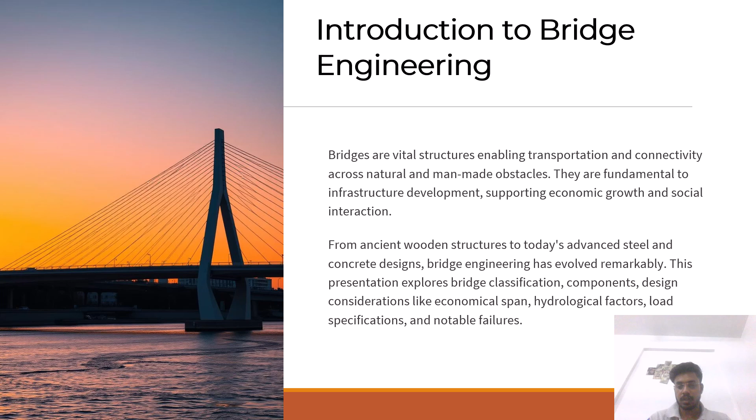Let's go to the classification and types of bridges. Based on structure, bridges are classified accordingly. Beam bridges are basically found in cities. Arch bridges are majorly used for railway bridges. Suspension bridges are made over seas where long spans are required. Cantilever bridges can also be found in major cities. Truss bridges are also used for railway transport basically. Based on material, bridges are classified as timber or wooden bridges, steel bridges, concrete bridges, and composite bridges, which combine concrete and steel together.

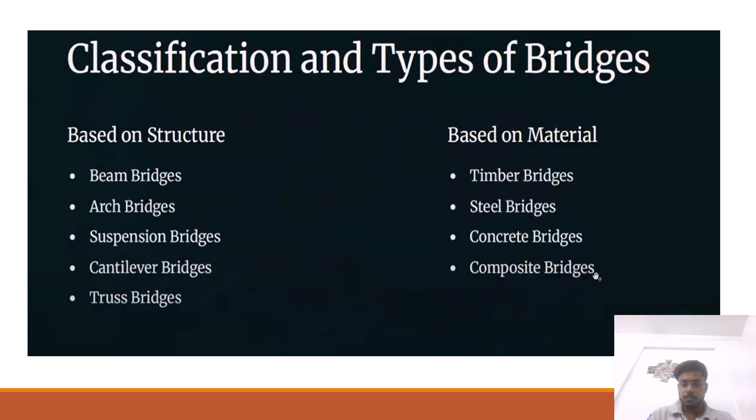Let's see the components of bridges. First, the deck of the bridge, which is the surface on which traffic moves, transferring loads to the supporting structures. The deck is the road on which vehicles travel. Next are piers and abutments, which are vertical supports that transfer loads to the ground. Piers are the intermediate supports, while abutments are the end supports.

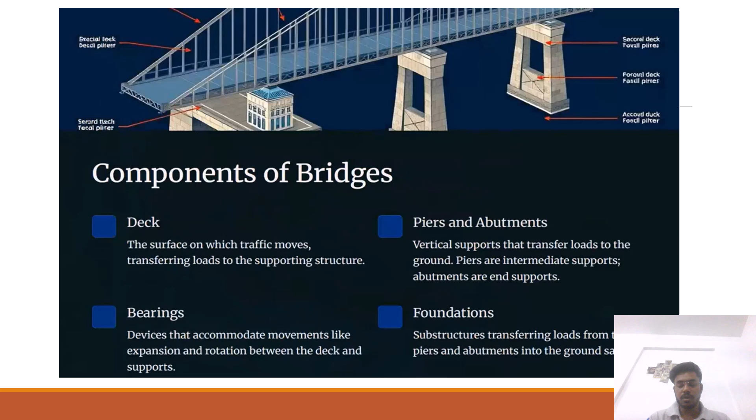Bearings are devices that accommodate movements like expansion and rotation between the deck and supports, transferring the load from the road to other components of the bridge. Then, most important, the foundations of the bridge: the substructure transfers loads from piers and abutments into the ground with the help of the foundations.

Now let's move to economical span and afflux. What economical span must a bridge have, and what is afflux? We will learn this in this slide. Economical span is the span length that minimizes total construction and maintenance costs by balancing material use, foundation complexity, and labor requirements.

As per the condition and referring to the IRC, the economical span of the bridge can be determined. The factors affecting the span of the bridge are material prices, labor efficiency, site conditions, and foundation costs, which significantly influence the economical span design of the bridge.

Now let's study afflux. Afflux refers to the rise of the water table or water level upstream due to flow obstruction by the bridge. It must be calculated and mitigated to prevent flooding and structural risks. This rise in water level must be taken into consideration, after which the height of the bridge should be determined and the bridge constructed.

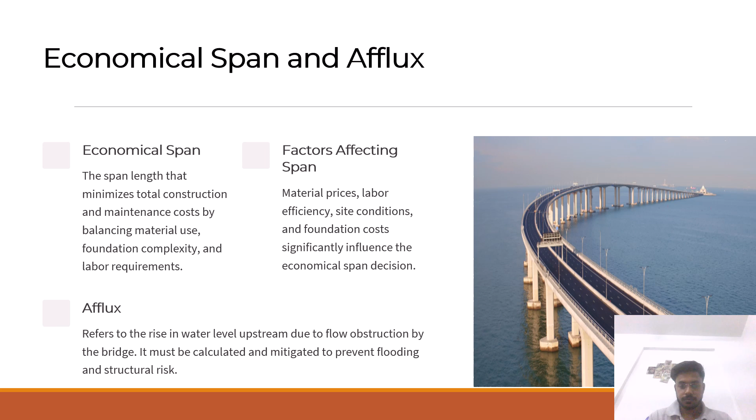Consider the high flood level, or HFL: the highest water level recorded during flood events, which is critical for setting the minimum bridge deck elevation and ensuring hydraulic clearance. As I said, during flood conditions, the recorded water level must be checked, and then the height of the bridge and bridge deck should be set accordingly.

Scour refers to the erosion of soil near the bridge foundation caused by flowing water, which can undermine stability and cause catastrophic failure if unchecked. As the columns of the bridge continuously undergo the movement of water, some erosion of the soil must occur, and regular checking of this is needed to prevent damage or natural calamities.

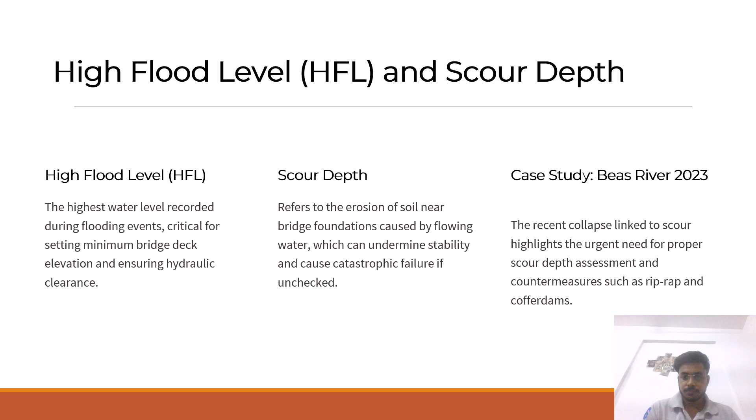One case study is of a bridge collapse in 2023, linked to scour. This highlights the urgent need for proper scour depth assessments and countermeasures such as riprap and coffer dams.

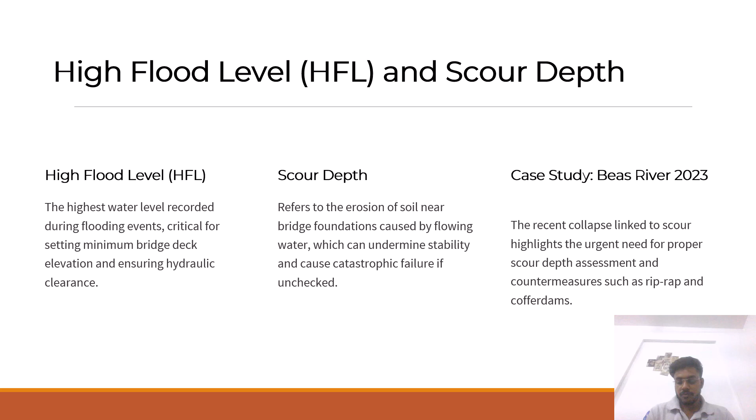Bridges undergo various types of loads. Let's study about the various types of loads. Bridges undergo dead loads, the constant weight from structural components like deck, beams, and fittings essential for baseline designs. Dead loads also refer to the self-weight of the bridge components itself.

Now let's look at live loads. Live loads are the vehicles traveling on the road, like dynamic weight from vehicles, pedestrians, and temporary loads that vary over time and location.

There are also environmental loads: external forces including wind pressure, seismic activities, temperature-induced stresses, and water flow impacts. These environmental pressures act on bridges and may affect their life and durability. Load combinations: the design must consider realistic combinations and serviceability under various conditions.

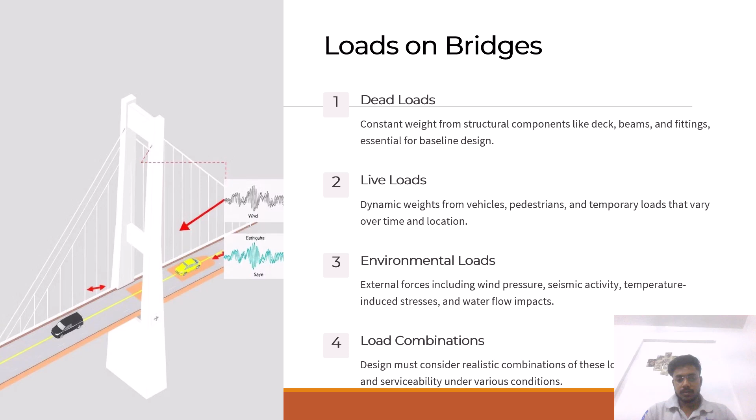Load combinations and the design of the bridge must be done taking into consideration the IRC standards for the preparation of bridges.

Now let's go through some IRC load specifications. IRC Class AA loading: designed for very heavy vehicles including military tanks and multi-axle trucks, to ensure ultimate strength capacity. The Class AA IRC is made for heavy vehicle loads moving on the bridges.

Now let's look at IRC Class A loading: a standard loading condition for regular vehicular traffic such as cars, buses, and trucks, representing maximum expected loads. Class A loading is for normal public service bridges.

IRC Class B loading: temporary or light traffic loading, applicable during construction phases or situations with light traffic volumes. It is followed when there is low traffic or movement of vehicles on roads, or during construction phases. Following IRC codes ensures bridges withstand expected traffic loads safely and maintain longevity within the Indian infrastructure context.

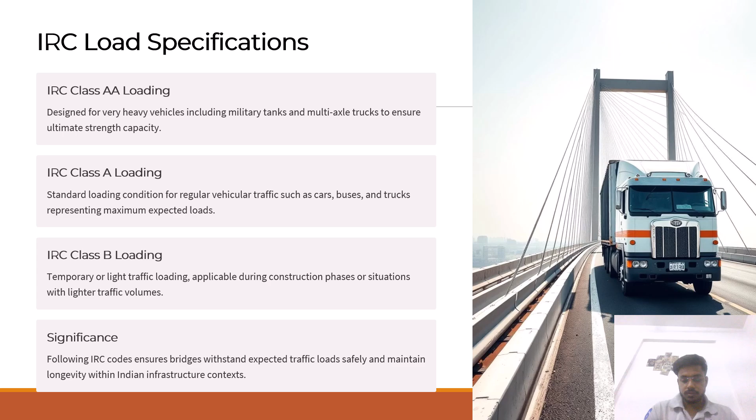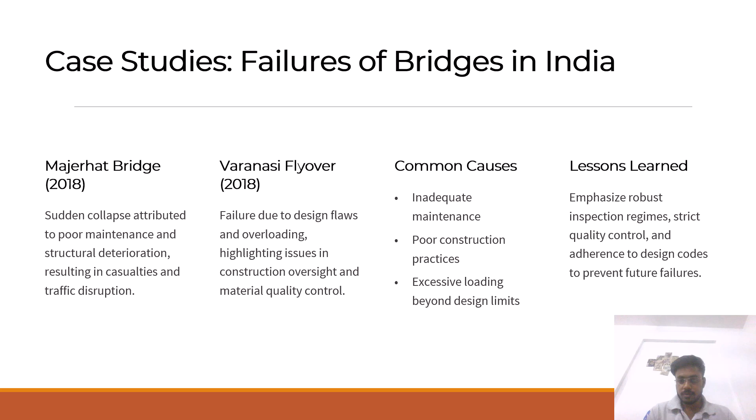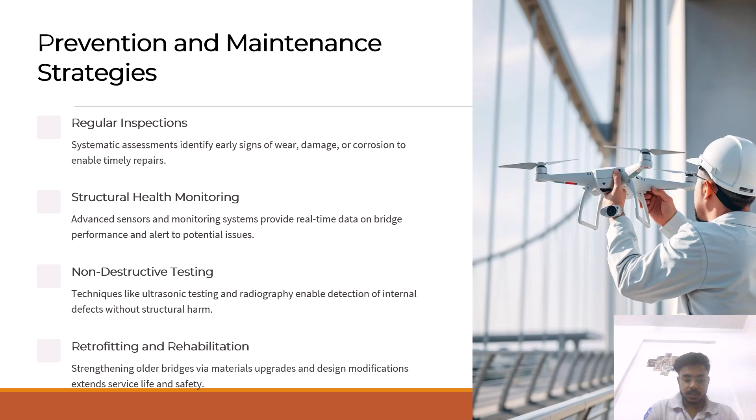Retrofitting and rehabilitation: strengthening older bridges via material upgrades and design modifications extends service life and safety, using advanced technologies and measures for retrofitting and rehabilitation of bridges.

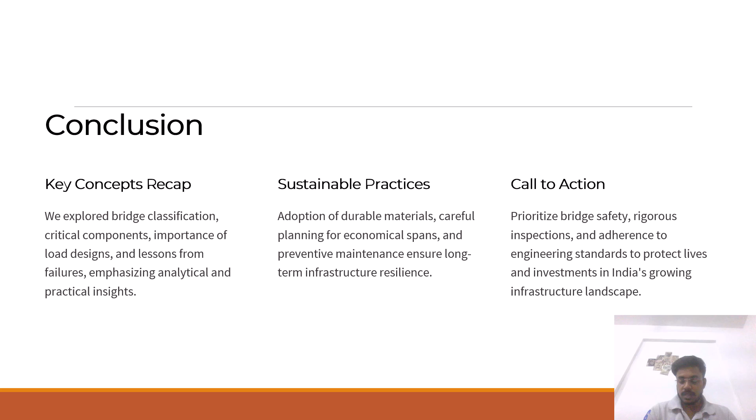And let's call to action: prioritize bridge safety, rigorous inspections, and adherence to engineering standards to protect lives and investment in India's growing infrastructure landscape. We must take care of bridges on a regular basis and follow the standards to protect investments. It's important. Thank you.